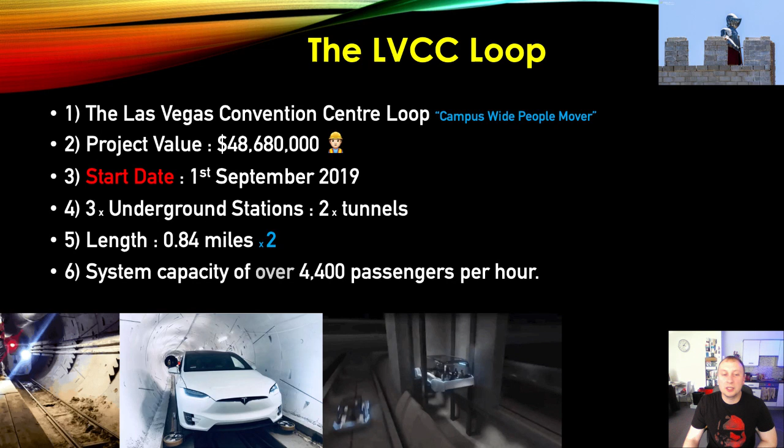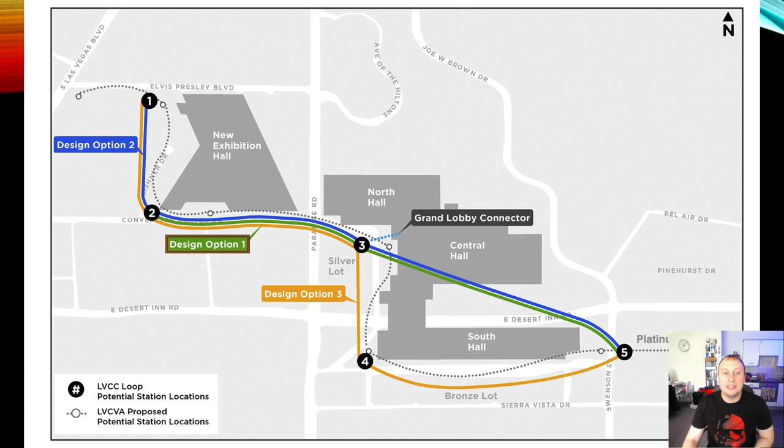This is one of the initial plans that was released when we got the contract sign over. As you can see, there are various routes. The route that we have gone for is design option 1 there in green. As you can see there, it is the middle line, the green line that runs from points 2, 3 and 5.

My sources of information. So just to clarify, guys, I don't make stuff up. If I do say things that are incorrect, it's because I'm making an assumption. Hopefully I don't do that too often. But for this particular presentation, my information has come from the LVCC plans, which were issued quite recently in July. The Las Vegas Loop contract document, which is basically the contract document. It's around 200 to 300 pages. Most of it is fluff, which I believe we looked at quite recently with yourselves.

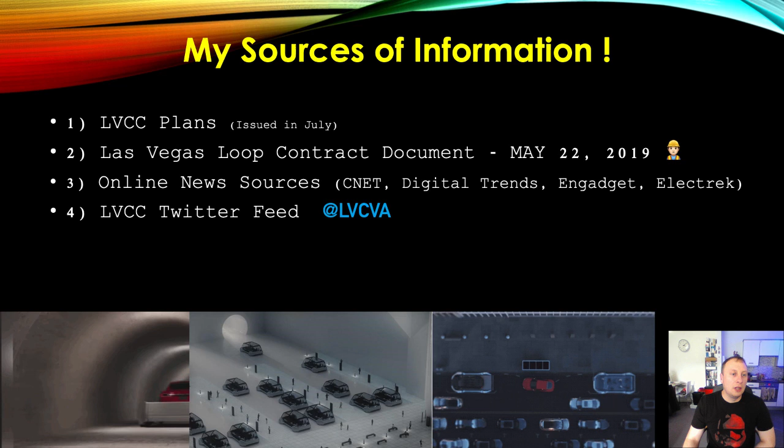Online news sources, there's various places. A lot of it is basically just copying each other. Some of it is speculation. Some of the information is actually incorrect. So you've got to be careful when you're dealing with these websites. But there's a lot of good information available on CNET, Digital Trends, Engadget and Electrek. LVCC Twitter feed, definitely I recommend you following that, and of course Elon Musk, who's pretty active on the old Twitter these days.

So what is this? This is our program. This is our initial program. It may be modified. In fact, I'm pretty confident it will be modified, but for this moment in time, we're going to assume that this is gospel. This is what we're going to be working off.

As you can see, we are well down the list in terms of regulatory approval. The Boring Company design process, Las Vegas Convention Center design review. So they would have already reviewed it in the previous month. I assume there's no issues. They would have approved it. They are looking to do final approval, as you can see here, in the final week of August, which is not that far away. It's under 2 weeks away now.

So the Boring Company construction process begins in the first week of September. That is not far away, guys. To be frank with you, there has been very little information in terms of what's going to be started in that first couple of weeks, but in due course that information will come to light and I will bring it to you live and fresh. So we are here in the construction phase, or just on the border between the design and the construction phase, if you look at the top there where it says design and construction.

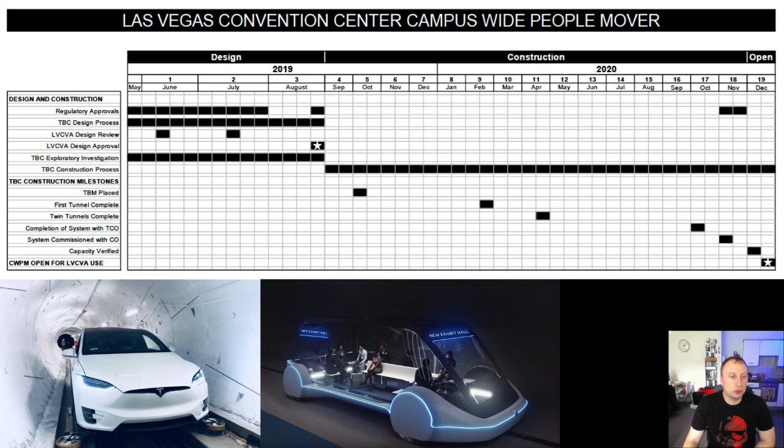So I've had a good look at the PDF documentation. I've got a few key takeaways, and then I'm going to show you the plans and examine what the hell is going on. So I wasn't too surprised to see this. The tunnel diameter is stated as 13 foot 6 inch, or to my European friends, 4.14 meters in diameter. I imagined it was somewhere around that.

However, in terms of the internal diameter, I'm not quite sure about that, because it is stated as 12 foot, but I think it's more around 12.5 foot. But we'll have to see in due course. It's possible they may have shrunk this tunnel from the Hawthorne test tunnel very slightly, although you wonder if the actual cutter head will be modified to achieve that.

There is a gap between the concrete segments and the actual tunnel that is bored. That gap is filled with grout. It's usually a gap of only around 10 to 20 millimeters, probably sometimes even less than that. So the actual diameter of the tunnel boring machine is around 13 foot 8 inch altogether when you look at the cutter head.

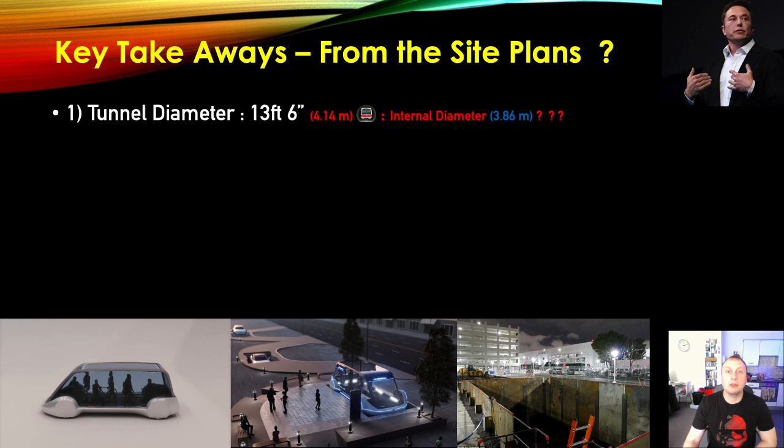There are pod elevators. Now that was quite a surprise to me. That is certainly the biggest surprise, other than the fact that the tunnel diameter is slightly smaller than was previously stated. There are elevators built into every station. There are multiple elevators on some. That allows pods to get out and to get into the stations when necessary.

I imagine it'll be a closed system. I imagine those pods will just stay in that system, unless they need a place on the surface to charge, which I'm not aware of at the moment. Unless charging is done at the stations at night time, I am unsure in regards to that, but I guess we'll find out in due course. But there is no charging area. There are elevators to the surface. Maybe there's a place on the surface where they can take the pods, maybe a local supercharger as such.

Mezzanine floor. Now there is a mezzanine floor. However, it's more like a raised pedestrian walkway. It's not very wide at all. It's probably at most around 16 foot wide. There's a main sort of a bridge that goes across the middle of the stations that sits about 18 to 20 foot above the concourse, and then that's linked to the platforms via some staircases.

Now, one of the things that I've noticed is they've not actually stipulated the use of any escalators. They have got elevators, my apology, but they don't have escalators. They've put traditional stairways. Now, in most stations around the world, they have escalators and they have a set of stairs, which I find quite interesting. Maybe they're just expecting people who need to use the elevators, but maybe it's a cost-saving exercise, I don't know. Maybe they plan to put escalators in at another time. But at this moment in time, it appears that they just have staircases.

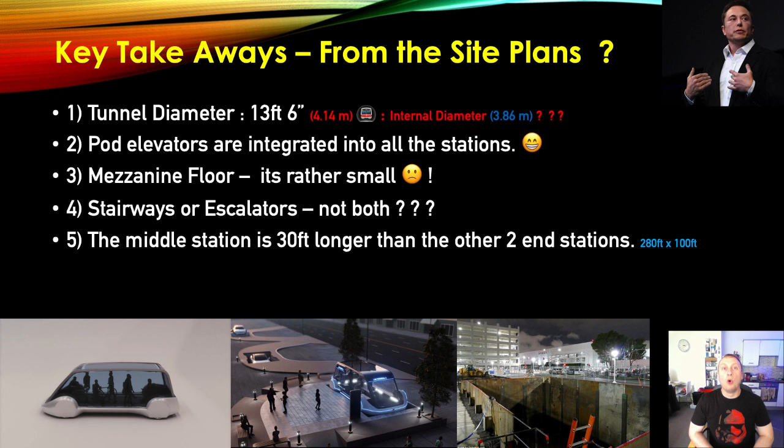The middle station, which is the one that's going to experience the most traffic in terms of vehicles coming from both the east and westward direction, is 30 foot longer than the other two stations. Obviously that's so they can accommodate more vehicles on the platforms. The dimension of that middle station is 280 foot by 100 foot, and that's clearly stipulated on the drawing.

One thing that I've noticed, and I've been on Google Maps and had a good look at this, Kishner Drive runs through the middle of Station 3. Now, are they going to remove that roadway and then replace it at a later date above the station? Or are they going to move the road entirely around the station? It's not even clear what is going to be on top of the station, whether it's going to be covered, what sort of canopy there's going to be. Maybe that will be taken on by a separate contractor other than The Boring Company.

I'd say probably yeah, but at this moment in time, I'm unsure as to what's going to happen to Kishner Drive, whether it's just going to be blocked off and become a cul-de-sac, and they'll just leave the stations open to the elements. Who knows? We'll have to see in later drawings.

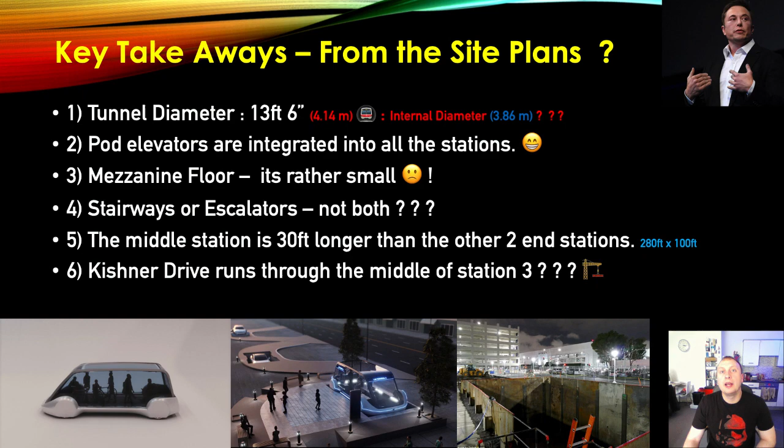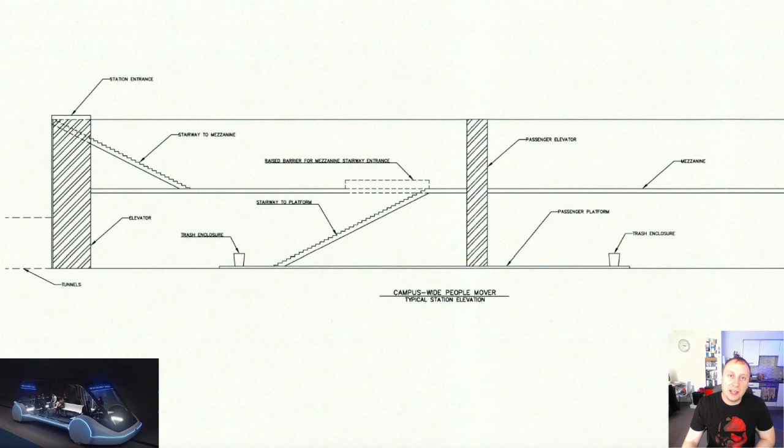This is the main station. As you can see, there is an additional tunnel here on the left side of this end station. Now, it's not clear how that is going to be constructed. I predict, and it's a 50-50 this one, that they will use pipe jacking for that particular short length of tunnel. It's around 300 to 400 foot long, maybe 450 foot long. It's not very long, maybe 500 foot, let's say 500 foot long.

It's not a great deal of tunnel, and it's probably more economically viable to do that with pipe jacking, and it can be done concurrently while they're boring the other two tunnels to the final end station.

As you can see in the middle of the screen, passenger elevators on each platform. There are 3 platforms. Each platform is linked by an individual staircase, and that staircase links to a mezzanine level, which is on here somewhere.

Once this starts working, see if that will work. Appears to have frozen, interestingly. That's unfortunate.

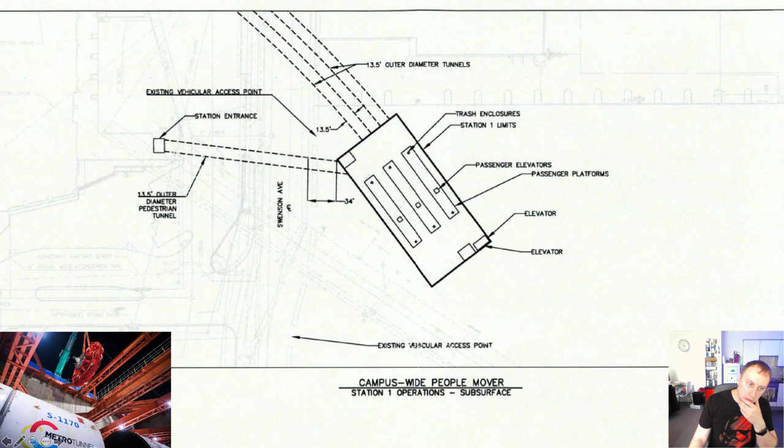There we go. Sorry about that, guys. For some reason it just froze for a second there.

At the end of each mezzanine point, there is a gated station entrance. I presume that around closing time they will close these station entrances, or at least close one of them and then close the other. In the right hand corner of this station, you can see the rectangle there. That is the pod elevator, and they are included in all the stations.

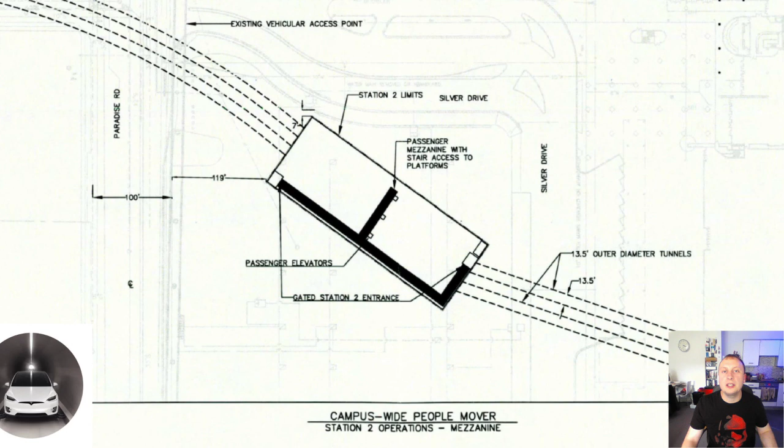Again, very similar for this particular station, passenger elevators and the mezzanine level. The tunnel is stipulated as 13.5 foot, or 13 foot 6 inches.

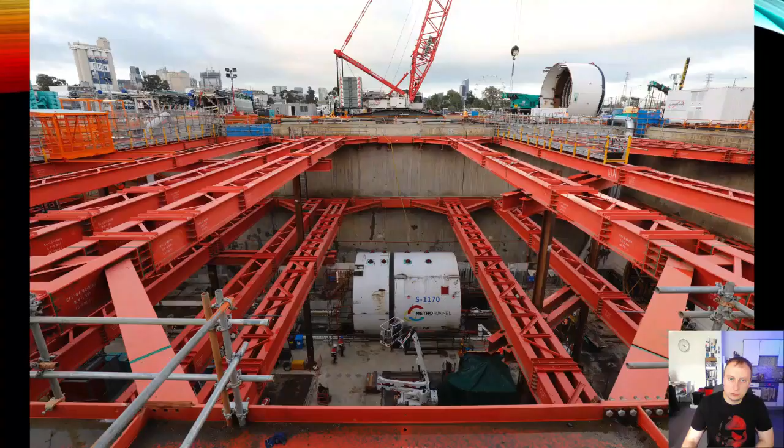Right, so just very quickly in terms of how these pits are going to be constructed, I have pulled these pictures from, I believe it was the Melbourne subway extension. It's either Melbourne or Sydney. Anyway, it doesn't really matter too much. As you can see, constructing a pit of this size, around 280 foot by 100 foot, is quite a big undertaking, a large civil engineering feat.

It requires a lot of false work until that structure becomes stable, until they install the mezzanine level, and I presume they will do so in such a way as that provides support to the retaining walls. In this particular instance, the false work has been installed using steel I-beams. They're installed in this double, or in some cases I think triple, truss layout. There are also 2 layers, and they're connected to the ring beam; in fact the ring beam runs on all sides of the retaining wall.

Why do we do this? Well, there's a lot of pressure on that retaining wall. If this false work wasn't there, it would buckle. Imagine if you put pressure on a playing card and the bottom of that playing card folds out. You need to essentially brace this structure from one side to the other, so those opposing forces are compressing in equal amounts on either side. Thus your props hold it together, and you've obviously got to make sufficient openings so you can get TBMs in and out of that pit. But this is the best method of doing it. It can be prefabricated off site and then dropped in when and where you need it.

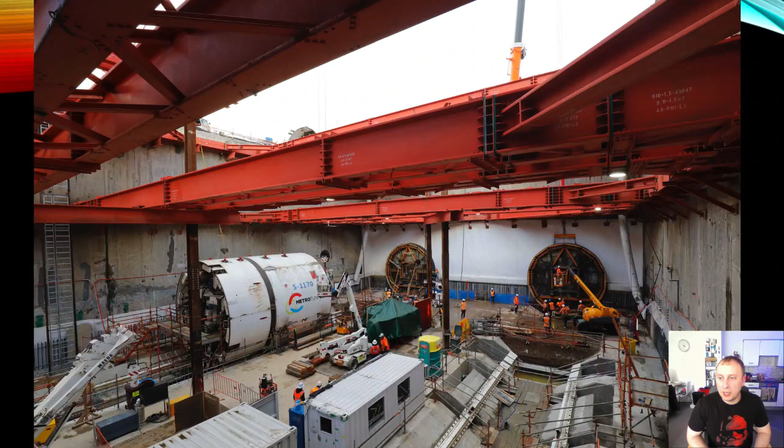The walls are made of concrete. I believe it's poured in situ, just based on what it looks like from face value. It looks quite rough in places. I believe they pour it in long, thin sections and then excavate the pit after they have poured the concrete. So they'll dig a trench around 30 foot deep and around 15 foot wide. They'll then fill that full of steel rebar and concrete. Once that is set, they will pour another section of wall, which they will link into it. And once this is finished, they can join it all up into one homogeneous structure and then excavate the pit so they can start dropping the TBMs in.

But prior to completing the full excavation, they will drop in these props. Well, initially it'll be the ring beam followed by the props. They'll then tighten that up and begin the remainder of the excavation, which will add significant pressure to these props as they dig further down. Hence why they have 2 layers of props.

Here's a machine sitting in the excavation. As you can see, this is a very big machine. This is around 17 to 18 foot in diameter, a lot bigger than the machines that the Boring Company are going to use. But in terms of how we excavate these pits, this is a really excellent example of how it's done. As you can see, where the trusses meet the ring beam, you have these knees. Knees are very important. If those knees were not there, the props would actually shear through the ring beam and possibly even the retaining wall. So it's very important that the ring beam is installed correctly and these props are braced sufficiently and adequately strengthened with trusses.

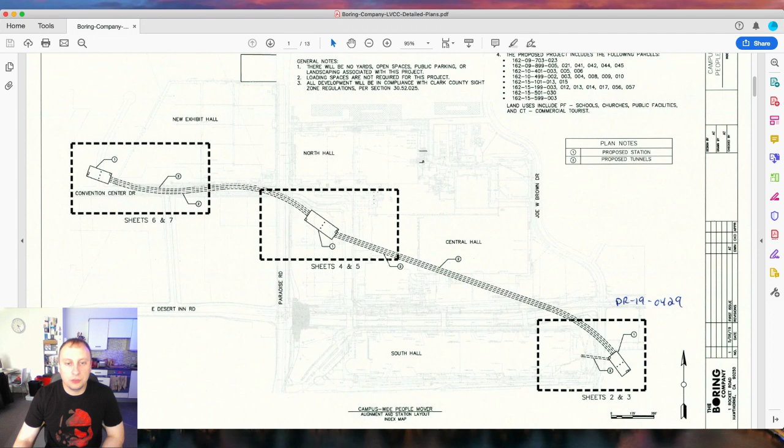In terms of building the station here, I'm of the impression that they will build that after the TBMs have gone through this location. But potentially they could build this station and then pull the TBMs through to the other side and then continue the boring process.

Again, we've looked at these drawings already. Just gives a good overview of how these stations are going to be laid out. I presume it'll be very basic, concrete walls, maybe a few benches here and there. Not really much furniture at all.

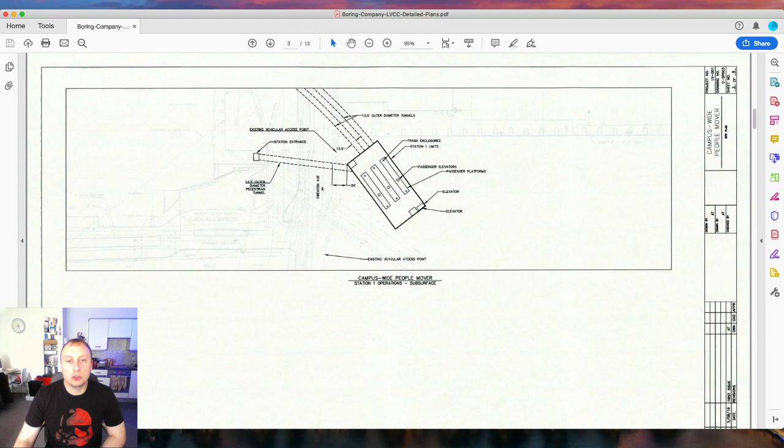Here's our cross section again. Why they've included a trash enclosure there seems quite bizarre to me, given that's not a structural element, but maybe the designer was a bit bored and decided to throw in where it's going to be. It seems quite a tall trash enclosure as well, based on the scale that they've drawn this document.

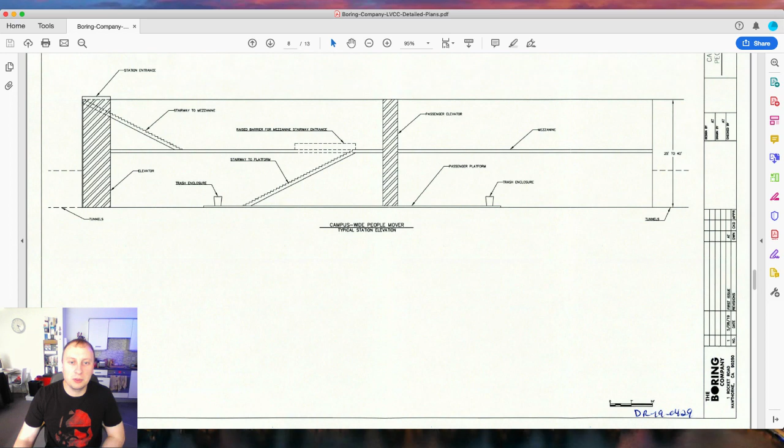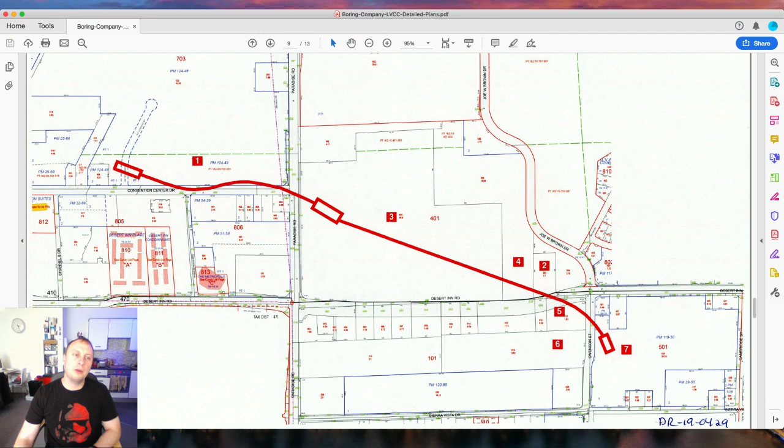It's an outline of where it's going to be going. As you can see, top left, there is a road already there. And that road doesn't really go anywhere, so you wonder whether that road is just going to be crossed off the map and forgotten.

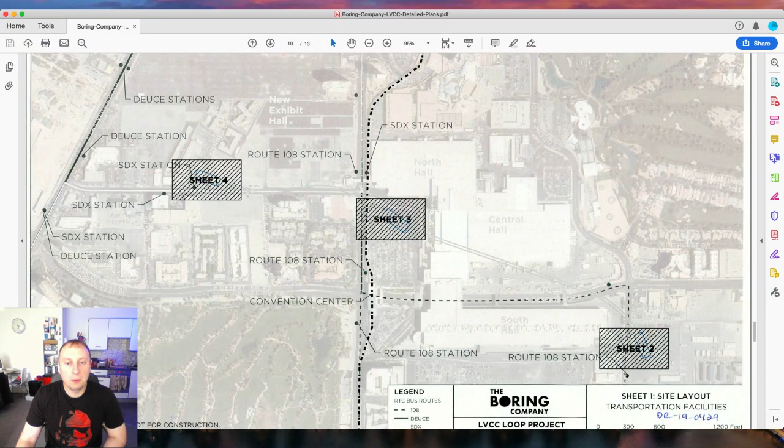So yeah, this is the end station, 250 foot by 100 foot. It's going to be situated in this parking lot. Whether that parking lot is still there, I'm unaware. The map on Google Maps hasn't been updated yet, so I can only see what was there a year ago. So I guess we'll find out in the future how it's going to integrate with the new conference centre.

Again, situated in this parking lot, so there's obviously plenty of space there to do what they need to do. This is the middle station, 280 foot by 100 foot. It's around 50 foot deep, I presume, maybe slightly less.

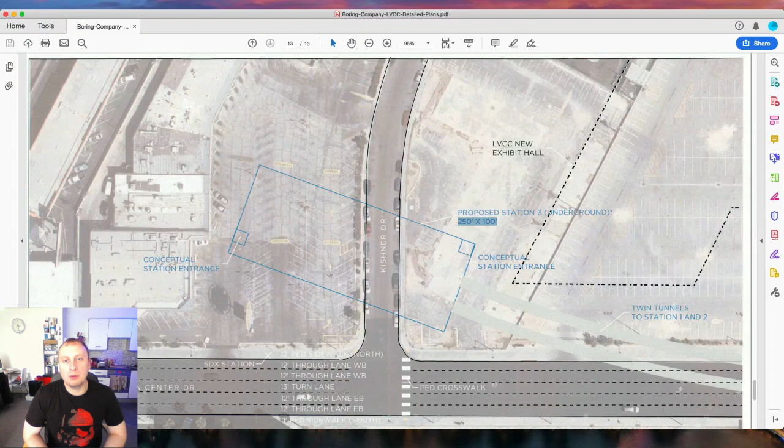And here's that final station, which goes across Kishner Drive. I presume that road is just going to be crossed off the map, because what would be the point in diverting round that, unless they can connect up that road from the other side? But I don't think that is possible.

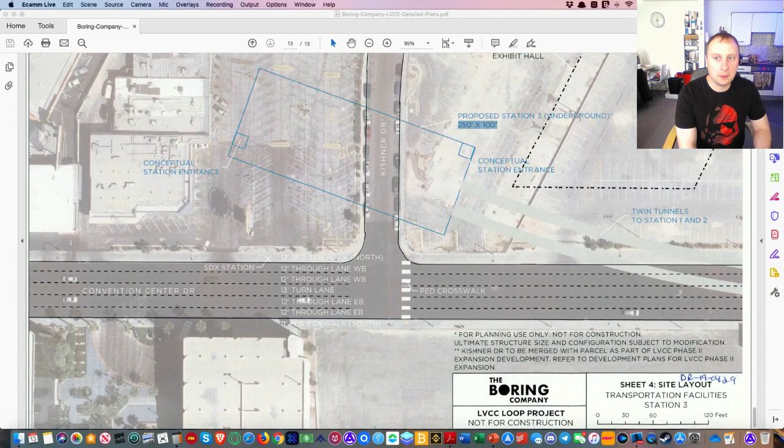I'm going to be doing an episode on the Boring Company China and why I think it's an exceptionally good idea to form a subsidiary company in China. Kind of try and maybe break that down into a bit of a series if I can, or I might just put it in one presentation.